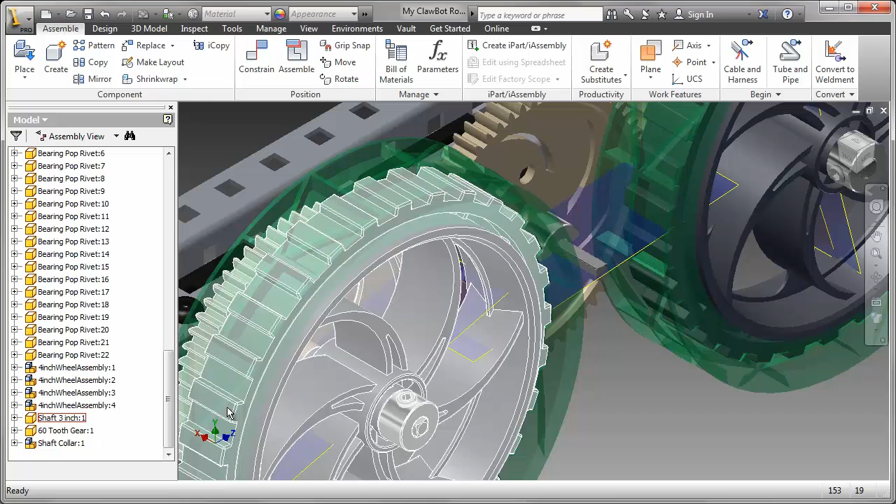Now that the drivetrain is in place, I'm going to go ahead and align the gears. One of the first things I want to do, however, is just double check that the gears align properly. So I'm just going to look down in the top view, and that looks pretty good. All the gears are aligned correctly.

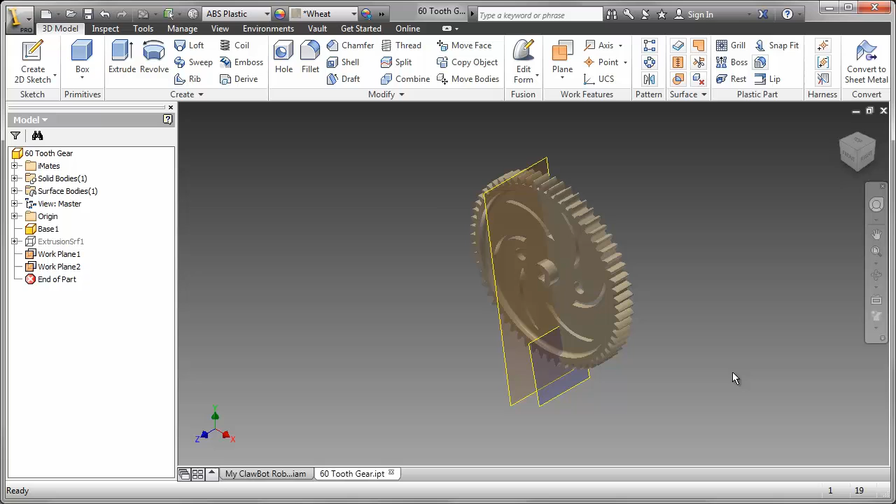Now, to actually align the teeth of the gears, what I've done is added work planes to each of the gears. Here we see one. I've just opened that up so we can see a 60-tooth gear. And there's a work plane going through a tooth and through the gap between the teeth, right in the center. I'm going to use those in constraints to align the teeth correctly.

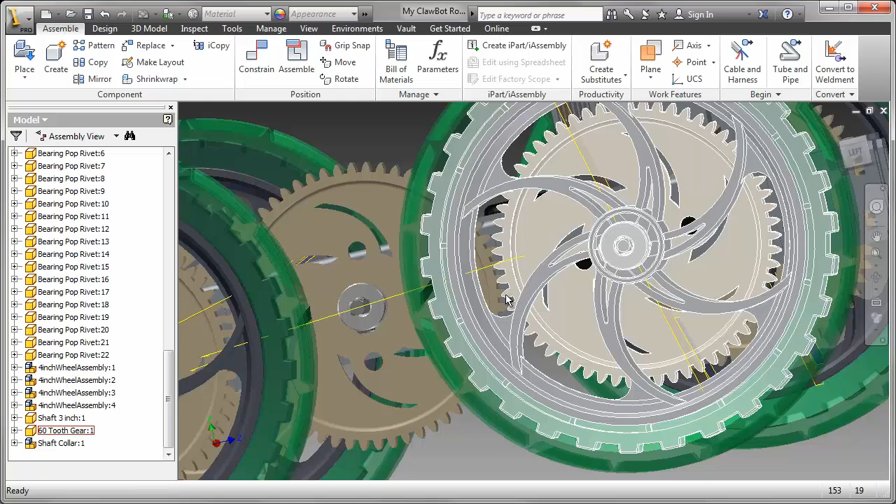And we can see the work planes on each of the gears. And I'm going to constrain those just using a mate constraint. An angle constraint would work as well. Angle constraints can sometimes be very useful, particularly for driving those constraints in animations. So just rotate that around so you can see it. And we'll get that one.

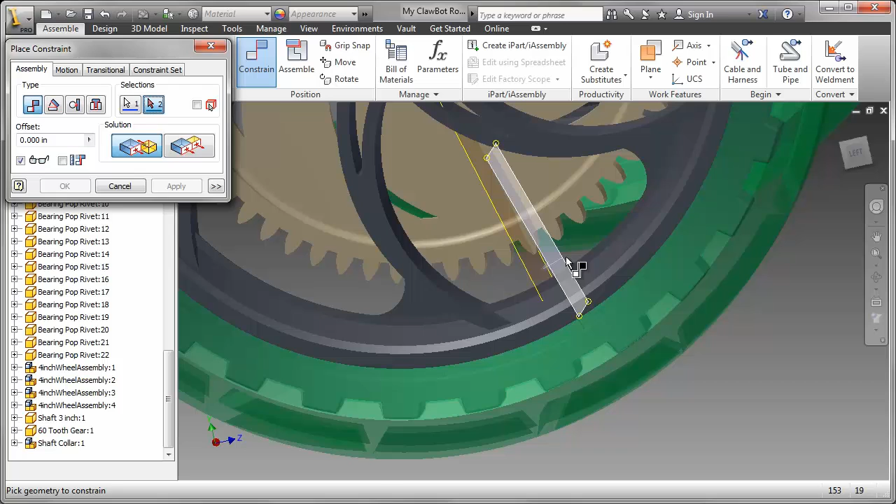So select the first one, and then select the second one. So you're selecting a long work plane and then a short work plane, and that should align the teeth of the gears correctly. Apply that. Go and do the same on the other one. Just rotate that around. So again, we'll select one of the long work planes and then select the shorter one. We can click on apply.

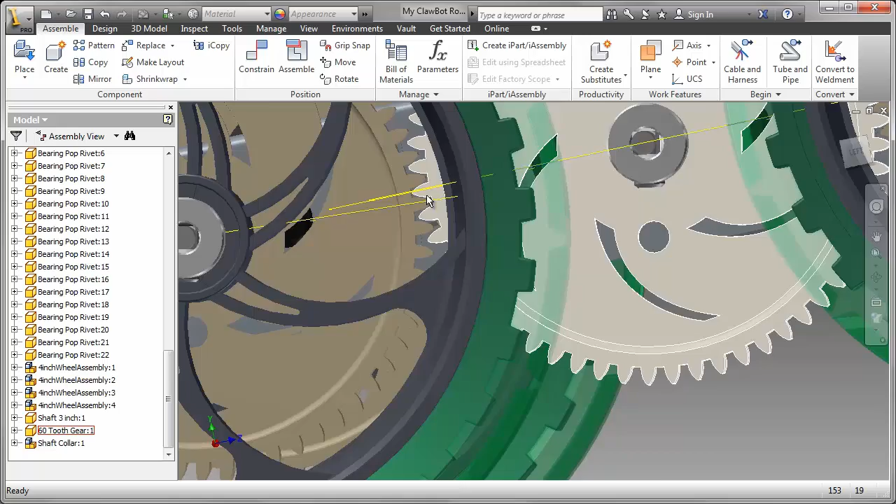We'll just cancel out of that and check it. And you can see that the teeth now align correctly. So when we rotate these, they will work properly. The next thing to do then is check that... they don't rotate. Wonder why that is. Well, we've just applied a couple of constraints that mate those together.

So to allow the motion to continue, I'm going to go into that 60-tooth gear, select the two constraints, and suppress them. Sometimes useful to rename those from mate 4 and 5 to something useful, just to remind you that that's the two constraints that were holding the gears in place. So I've started rotating the gears, and I want to check that they're rotating properly.

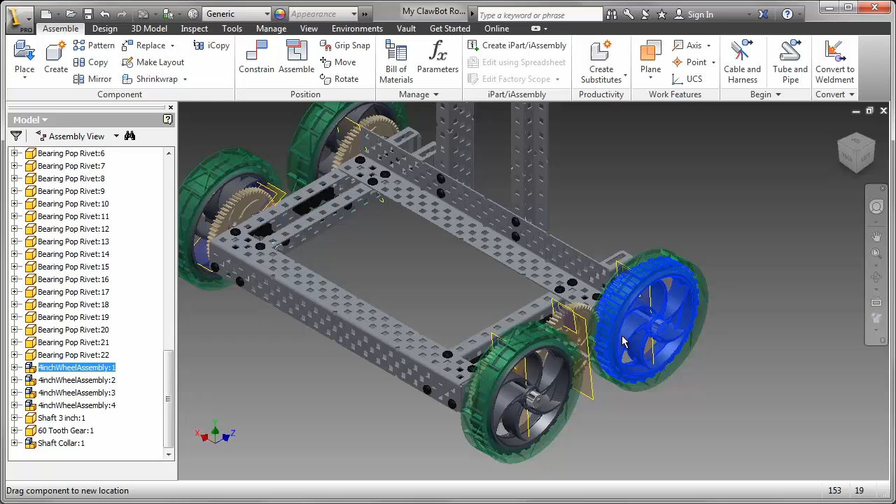To check that the gears are rotating properly, I'm just going to look at a side view. And, well, it looks kind of okay on the wheels, but I don't think the gears are meshing properly together. They're rotating the wrong way. So if you recall, when I created those rotation constraints, I just selected the default solution. It looks as if I should have selected that other solution. So let's go ahead and change those.

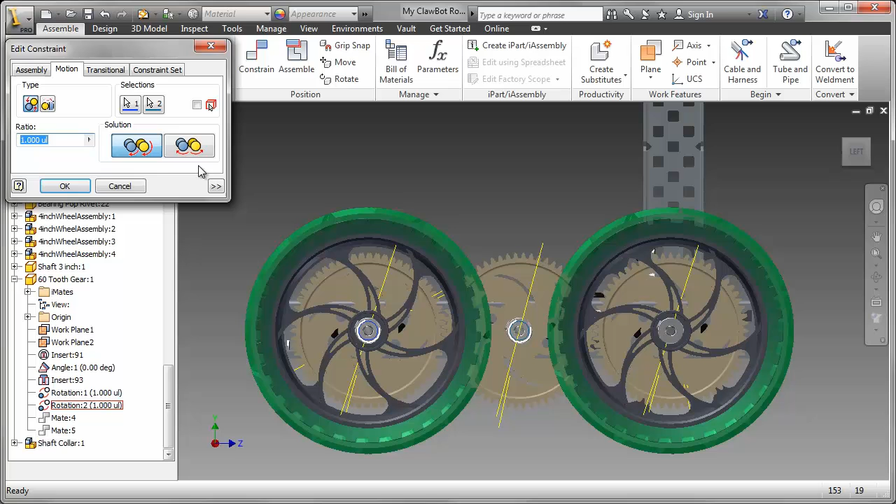There we are. Now let's rotate that counterclockwise. The middle gear's rotating clockwise, and the other one's counterclockwise. So that's good. Of course, we have to do that workflow for the gears on the other side of the robot as well.